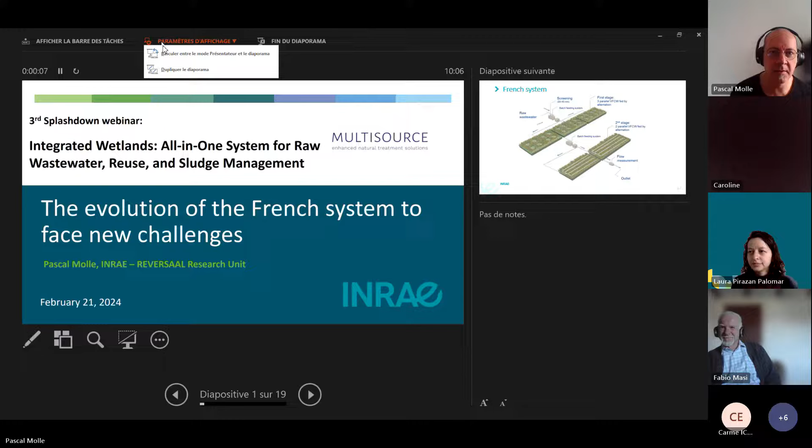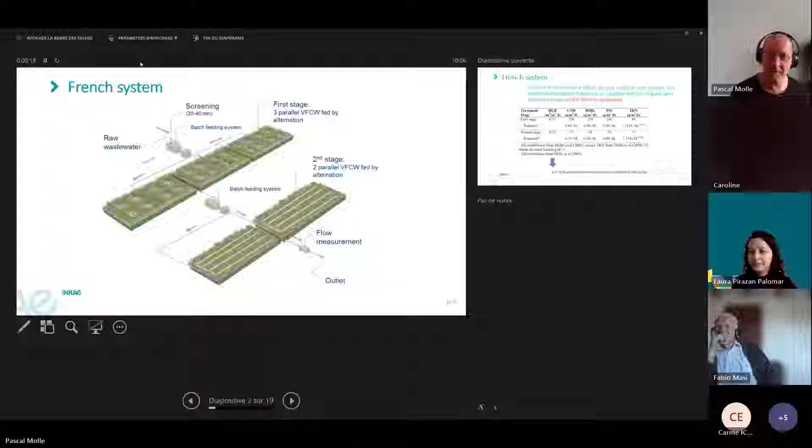There you go, thank you Laura. So I will share my presentation. Do you see it? Yeah, okay. Is it the good screen that you see? No, still not in presentation mode. Not even. And here? No, it doesn't change. Okay, I will do it like this. Should be good. But no. I'm not sharing anything, right? No, okay, I'll do it again. Yes, should be good.

Perfect. So good morning everybody. I will present the evolution of the French system. The French system is the system that historically treats raw wastewater directly, meaning we treat the wastewater and the sludge as well. I will show a bit of the evolution, and at the end, what we are digging into in the framework of MULTISOURCE, the evolution to face new challenges. One of them being to have a decentralized approach in urban areas and for reuse purposes. It will be a quick presentation, so obviously not enough time to go deep into the details of design and performance, but just to give you a main idea.

So historically, the French system's classical design is two stages of unsaturated vertical flow system. As you can see in this figure, at the inlet there is only a raw screening to be sure that all the pumping or gravity dosing can work properly.

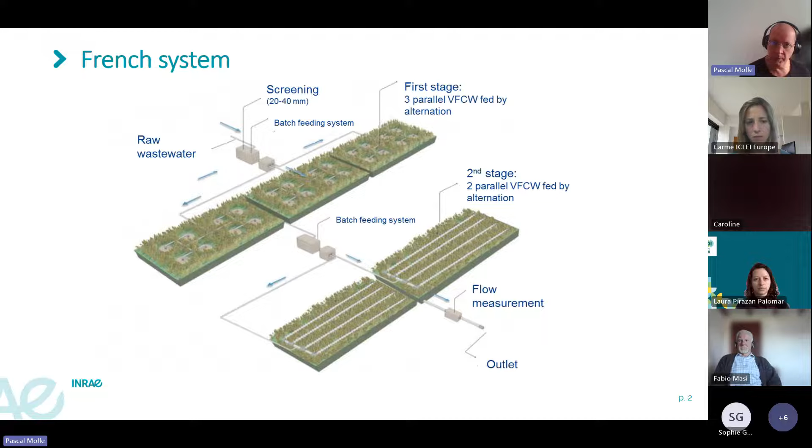This system is designed according to load on the filter in operation, because there are 3 filters to manage this organic deposit, to have filling periods and rest periods, allowing the deposit to stabilize. Only 1 filter is in operation at the same time. We look at hydraulic load, COD, BOD, TSS, and TKN loads. For organic load, it's measured in grams per square meter per day on the filter in operation.

That's how we can design the surface we need to implement. And we have well-established removal performances for each stage. You can see that for COD it will be 80% at the first stage, 90% for BOD, and 90% for TSS. So the removal performance is quite high.

It's not the same for TKN, because the more we load the system, the less we treat TKN. So there is a relation that has been established that allows us to define what the performances will be at the outlet.

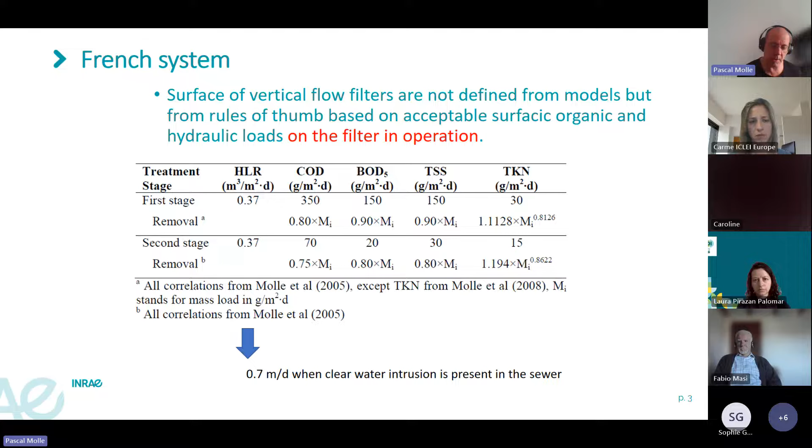For the hydraulic load, we have to keep in mind that we can have higher hydraulic load when there is clear water intrusion in the sewer. That's the water table from the ground entering the sewer, which can bring high hydraulic loads. In that case, we know we can double the load without any problem on the system, showing the robustness of the system. So that's for clear water intrusion.

But for storm water arriving in the sewer during rain events, we have other rules. We can design by security, increasing a little bit the surface of each filter. But we can also use simple design rules that we developed in different research projects to accept higher hydraulic load.

Here's an example of daily loads on a full-scale system, a 2000 people equivalent system. The nominal load in dry weather condition is 37 centimeters per day on the filter in operation, but sometimes we can reach more than 5 meters on the filter. If designed properly, we can accept a huge amount of storm water, because it doesn't happen every day.

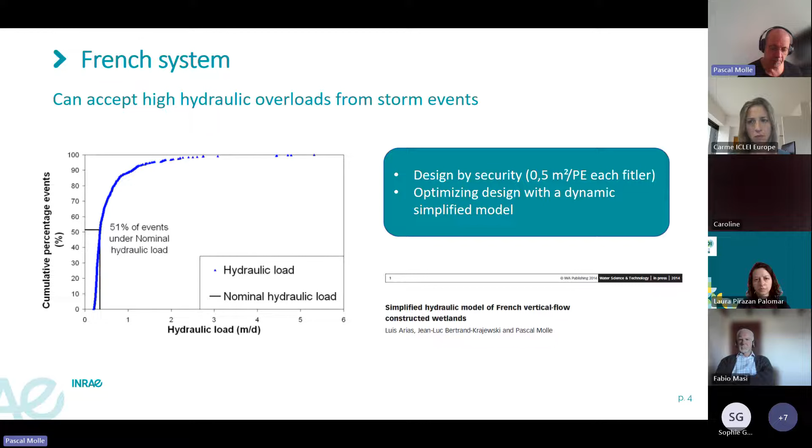So it's really important to show that we can face very large events of hydraulic load.

The question was: is it possible to increase the performance of the first stage to avoid needing a second stage afterward? This would decrease the cost and the footprint, for example. For that, there are different solutions.

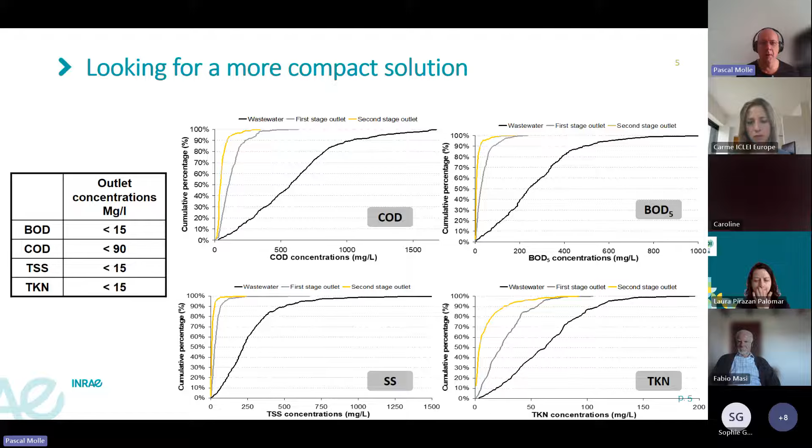We can use only one stage system and make recirculation. For that, we need to increase a little the surface of the system. We usually fit the system to have 100% recirculation, and then we can ensure those outlet concentrations.

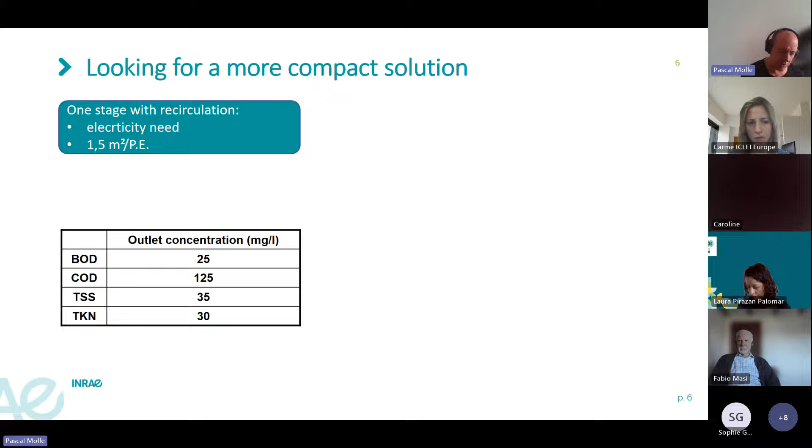But recirculation means electricity somewhere. So the second question was: is it possible to work with a one stage system without electricity while increasing performance? That's where another system arrived a little more than a decade ago.

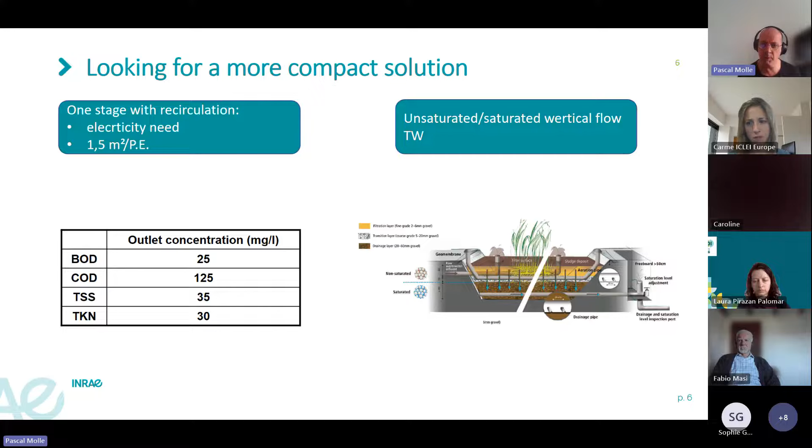It's a vertical flow system, unsaturated on the first part, classically the French system, and below there's an increase of the drainage layer to implement a saturated vertical flow system at the bottom. The objective is to enable denitrification, and denitrification means carbon consumption as well.

Here's an example of the performances we can achieve for denitrification in this saturated layer. These performances increase with the hydraulic retention time in the saturation layer, and also with the ratio of COD and nitrates arriving at the saturation layer.

We have main rules to define denitrification efficiency in temperate climates, and the other points at the top are for tropical climate, showing that with high temperature, the denitrification process is very fast.

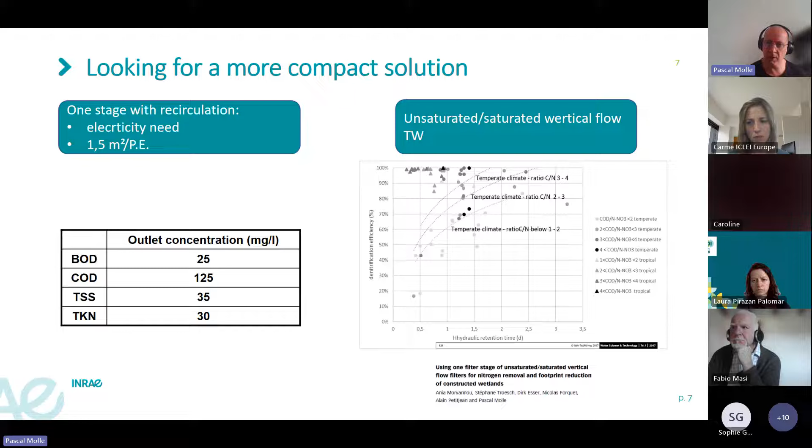With this, we can ensure high removal performance for BOD, COD, and TSS with only one stage. For nitrification, it will depend on the layer we put for the unsaturated filter and the depth of the saturated layer.

Basically, we can reach a level of 60% nitrification if there is no recirculation. If we do recirculation, we can increase this to 90%, but in that case denitrification will not be good enough, so we'll be low in terms of denitrification with recirculation.

But if there is no recirculation, and we can increase the retention time in the saturated layer, we can reach a maximum of 70% for total nitrogen removal, which is quite interesting and can be suitable for certain contexts.

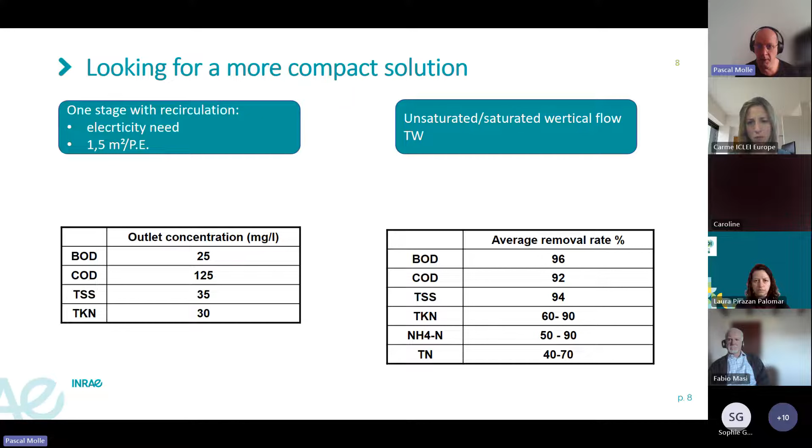The question after is, if we want to implement the system in urban areas for reuse purposes, we need to go further in terms of treatment. If we look at different constraints on the system in terms of treatment objective, from the very simple carbon to more complicated pathogens, for example.

And we look at some design rules here. I put only the compactness and the surface, but there are others. And if we look at external conditions, it can be temperate or extreme, for example.

There is a zone here when we want to implement this in urban areas where we need to dig a little bit more. It means that the zone needs a high level of treatment, to be really compact, and to face extreme conditions. Because, for example, the more you are treating a small area, a building, the more load variation and concentration variation you will have. So we need to face this.

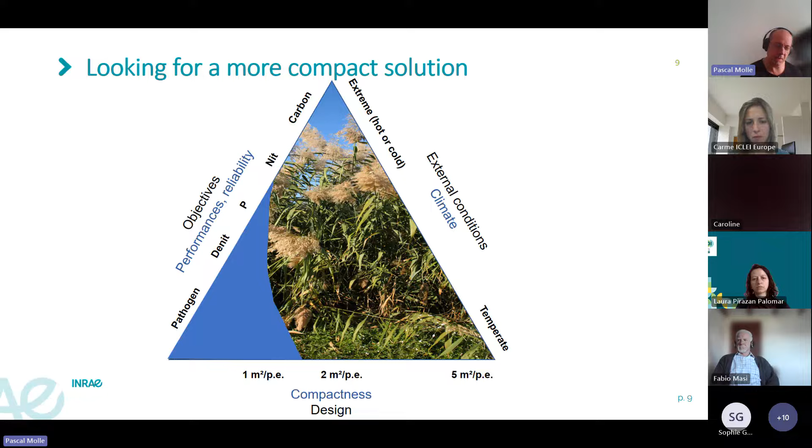For that, there is a system that has been developed by a private company, EcoBird, that implements the possibility to accept raw wastewater on top, but on the bottom there is aeration, forced aeration, to increase the performance.

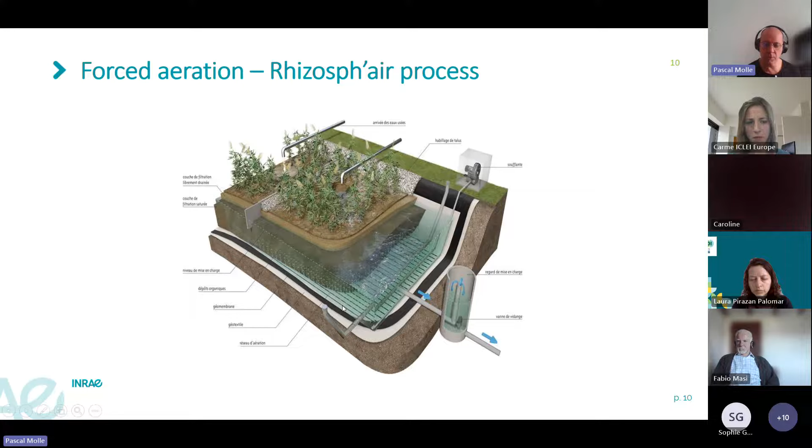The system is basically composed of two filters in parallel, just separated in the middle. The first layer of the system is unsaturated, but very, very thin, only 20 centimeters. And below there is a 1 meter deep saturated system, in which we are blowing air to bring oxygen according to the needs.

So basically, when we are feeding the system here on the right, the water will have a mix of vertical and horizontal flow. And then the outlet will be on the other side. That means it will go through the other filter, but below the unsaturated layer, to get to the outlet here. So here we'll get a horizontal flow.

So we have a primary filter where we are feeding the system, and a secondary filter when there is no feeding, during 3 days and a half. And when we do rotation, it's the opposite: we feed here, close the valve here, and the outlet will be on the other side.

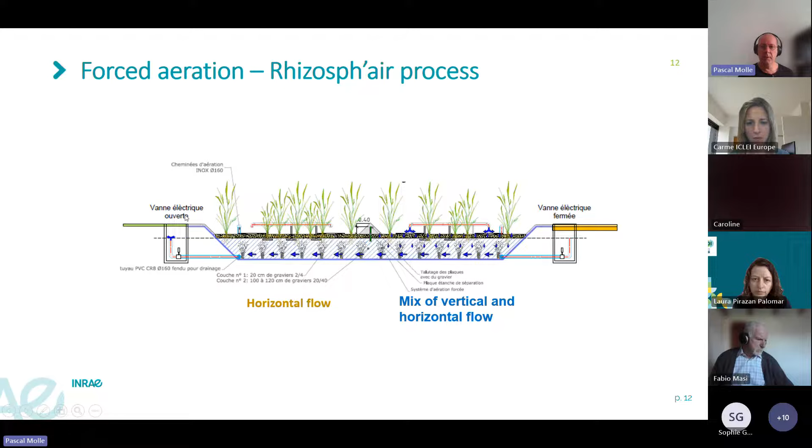With this system, there are different full-scale systems that have been done for small villages, which we monitor and are still monitoring. There are something like 25 systems like this in France actually, and you can see it's really good for COD, BOD, TSS, and even nitrification. It's a full treatment in one stage.

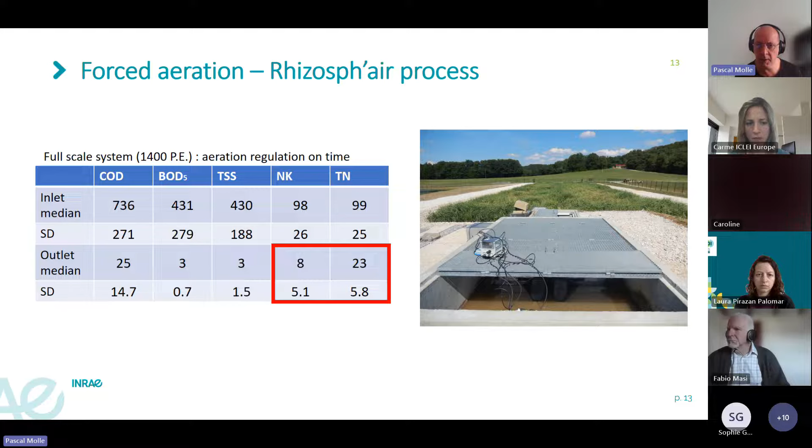For nitrogen form, it will be different according to how we are managing the aeration strategy. If you look at the evolution of oxygen concentration in the saturated zone, you can see that we can put aeration on to add oxygen, then stop aeration to decrease it and implement an aerobic phase and an anoxic phase. Thanks to that, we can improve TN removal in the system.

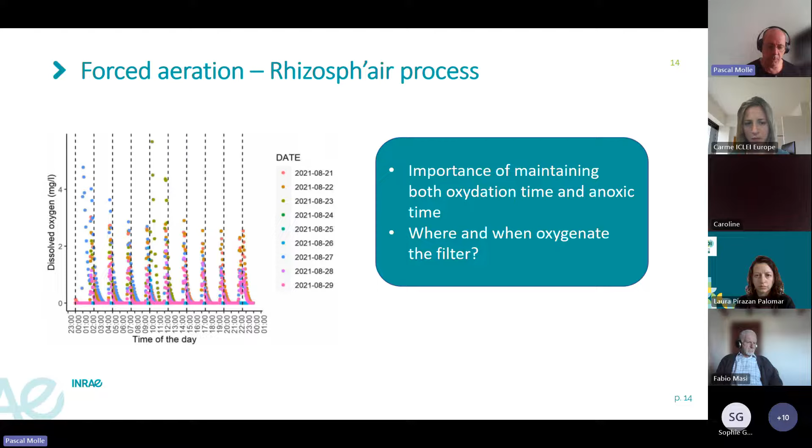The question is where and when to put on oxygenation in the filter, because we can do it differently in the primary and in the secondary filter. The other thing is that we need as well to adapt the design of the aeration system itself.

For that, we needed to understand the role of aeration. There is here an example of how air is distributed inside a column according to the airflow, the type of material we put in, and the number and density of diffusers we have. Basically, we can see it is possible to have an uneven distribution where there is no color in the column, meaning we do not see where the air is passing because it's too thin in the middle. So the bigger the material, the more heterogeneity we will have at low flow, and we will need to increase the airflow or increase the diffuser density to have a homogeneous distribution of air inside the system.

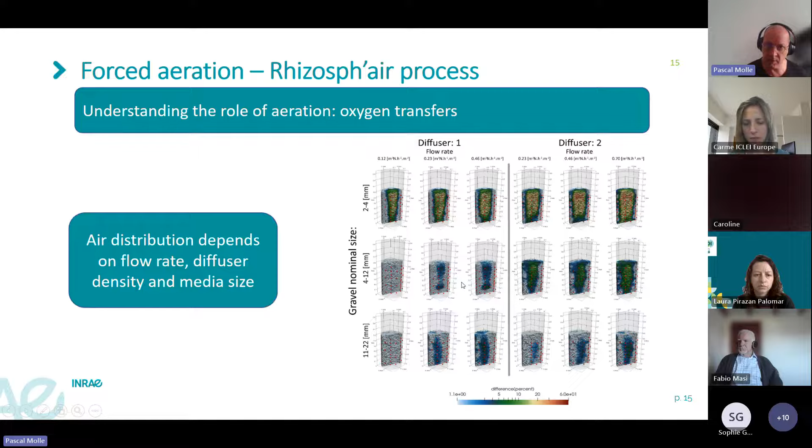Then we can look at, according to the number of diffusers and the particle size of the media, how much oxygen we would transfer to the system, which is really important in design, because we need to know exactly what we can transfer for the consumption, for degradation of pollutant, and the consumption from bacteria. We can see that if we increase the airflow, we increase transfer, but we reach a plateau at a certain point, showing there is no need to go to high airflow, because in that case we will consume too much energy for nothing.

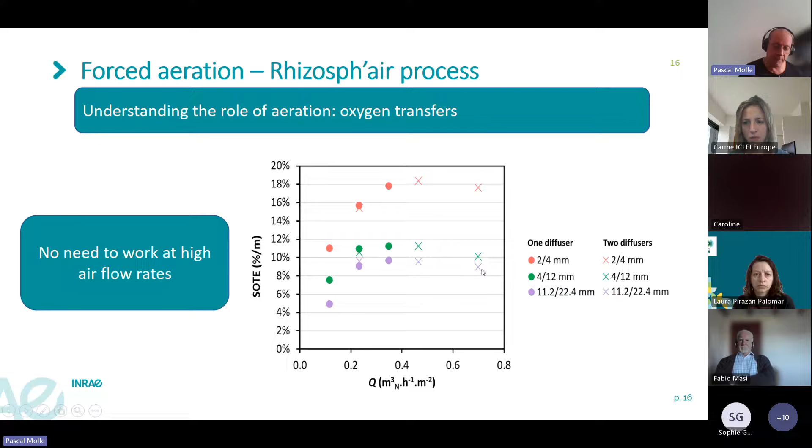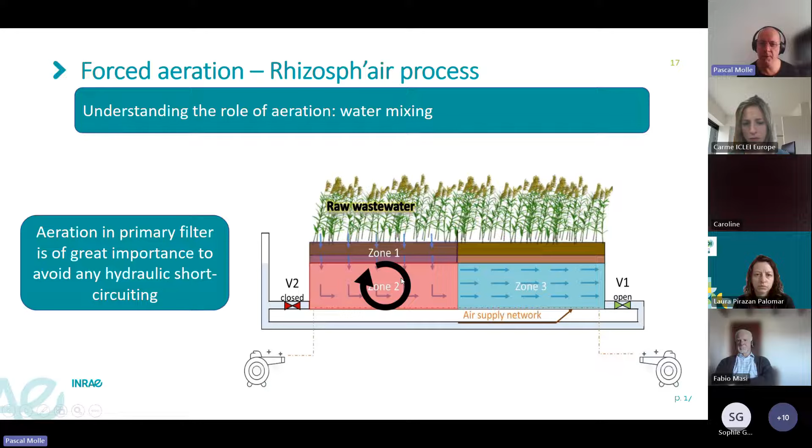So we have rules for that. And then the question is where to put aeration in the system and how much. And what we observe is that it's really important to have a good aeration strategy in the primary filter, because it's also a way to have good mixing and to avoid any hydraulic short circuiting inside the system. So it really improves the performance.

And after, what we can see, there's no difficulty for the carbon degradation, I would say, and solid degradation or entrapment. We can reach full nitrification easily, but for TN removal, there is a different strategy for that.

We can do it by time, by flow according to the inlet flow, or with a probe that we can put inside and control aeration according to the oxygen content. By time, we can reach 70% of TN removal. By flow, we can be a little bit more precise and reach 80% removal.

And by oxygen content, it's what we are digging into actually a little bit more in the framework of the MULTISOURCE project. There is already a first paper that discusses all this strategy, but it just shows that we can go quite far in TN removal, even in only a one stage system.

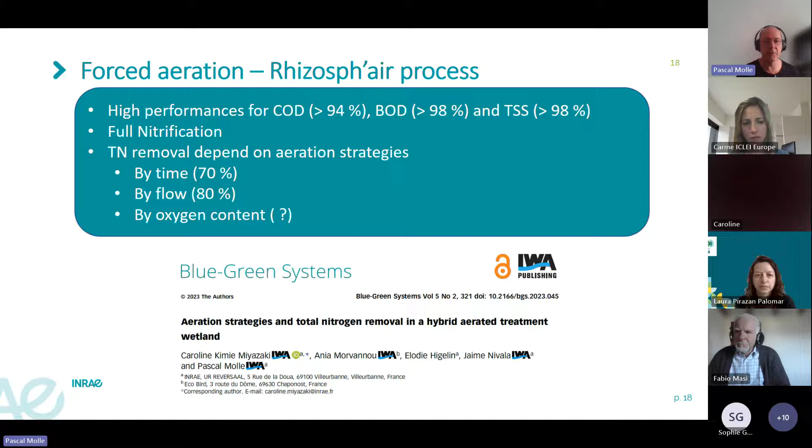Not presented here, but which is important for reuse purposes as well, is that we are monitoring the system for pathogen removal and for micropollutant removal. No time in this presentation to speak about that. Well, thank you for your attention, and if you have any questions, I'm here.

Thank you very much, Pascal. This indeed is super inspiring, also for keep on digging and consulting, especially this paper. I'm very curious about it. I'm definitely going to have a look, to keep on learning these aeration strategies and how these wetlands also are working for wastewater treatment. It's very, very inspiring. The questions, please.

Fabio, your mic, Fabio. Yeah, the mic is muted. Sorry, so I'll start again. It's fine, there you go. But so the screen is good. If you were sharing the screen, maybe you can. I'm not anymore. Oh good. Yeah, you can try again.

Now it's perfect, good. So many thanks, Laura, for the nice introduction before, and thanks to Pascal for the perfect explanation of the processes which are behind this kind of technology. And what I'm going to show you is just how we practitioners have applied the theory in the real world. So I will just show some case studies of the different kinds of implementations for this technology.

So I'm just starting with some pictures of the oldest systems, which are the ones developed in France. In France now they have several thousand of these systems. If I remember well, it's about 5,000 at the moment, the ones which are full-scale realized in operation. They are all even quite well monitored, and there is available, at least for somebody — I mean not everybody has access to it — but there is a national database where all the data is well organized.

So it's possible to understand the performance statistics even for quite long operational periods. In this picture I've also put a picture of this self-priming siphon. That's the one more adopted for giving a lot of water in the unit of time and not using energy to the beds, the two following stages of the beds.

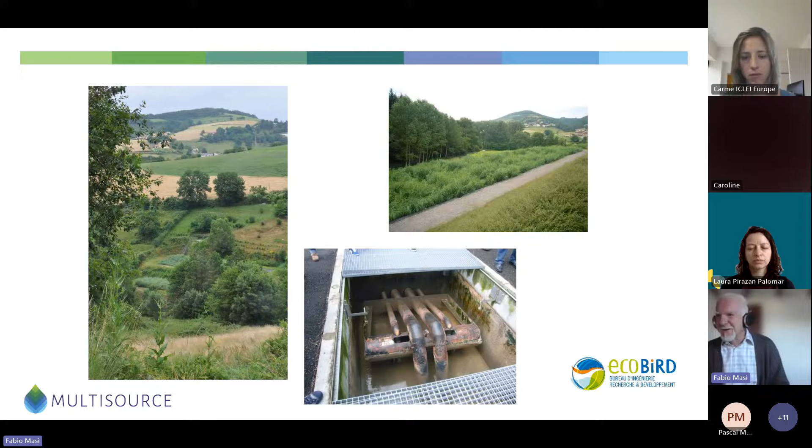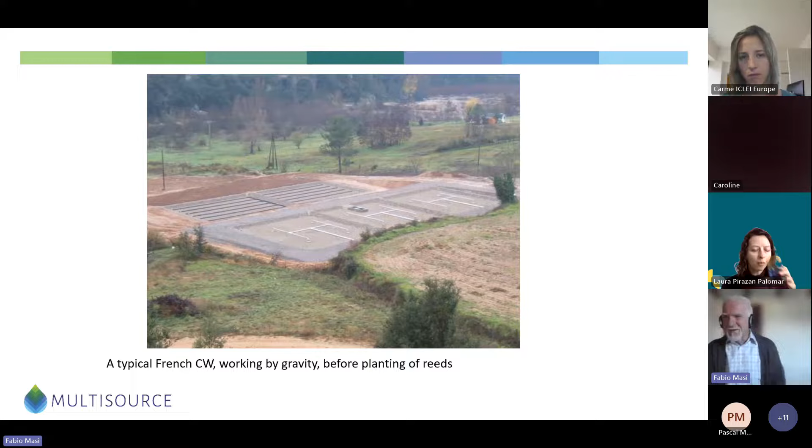And here you can see in detail how the feeding system — those are normally steel pipes — are mounted over the first stage of the French system. So those are all installed in France, and the normal range has been for several years below 2000 PE.

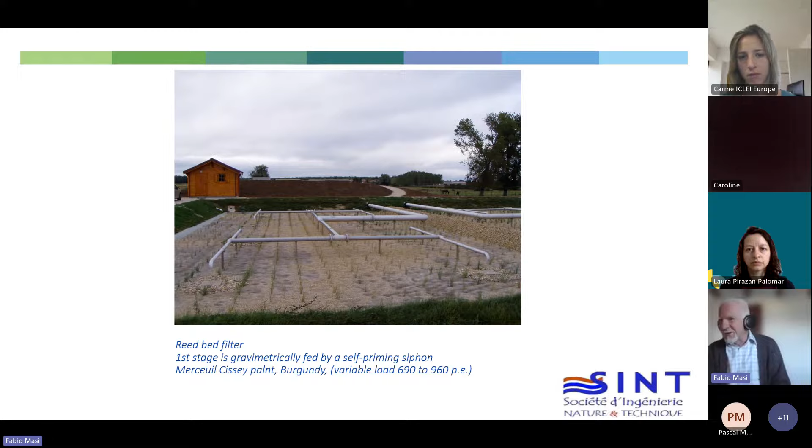According to the Urban Wastewater Directive of the European Community, which is nowadays anyway changing, the threshold for having a mandatory biological treatment, so the secondary treatment, is going to shift to 1000 PE. And that's opening the market for this kind of French systems for about 350,000 small settlements, which are between 1,000 and 2,000 PE, which are present in Europe and still untreated.

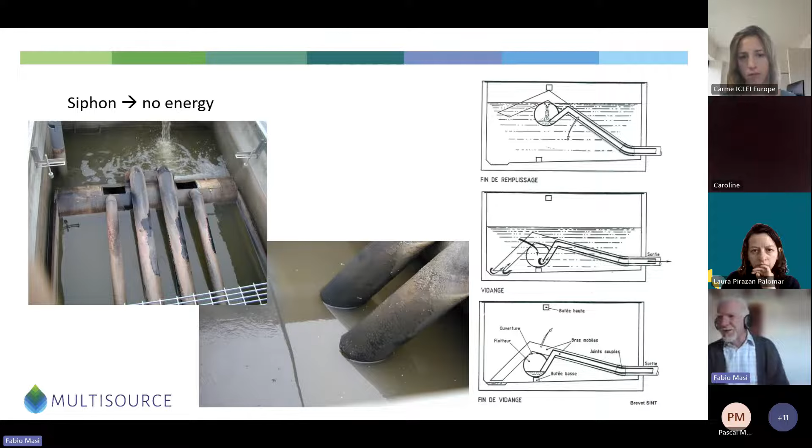And that's only the European market we are talking about. And it's already a quite good number in terms of market exploitation chances in the future. So here you see some details of the siphon.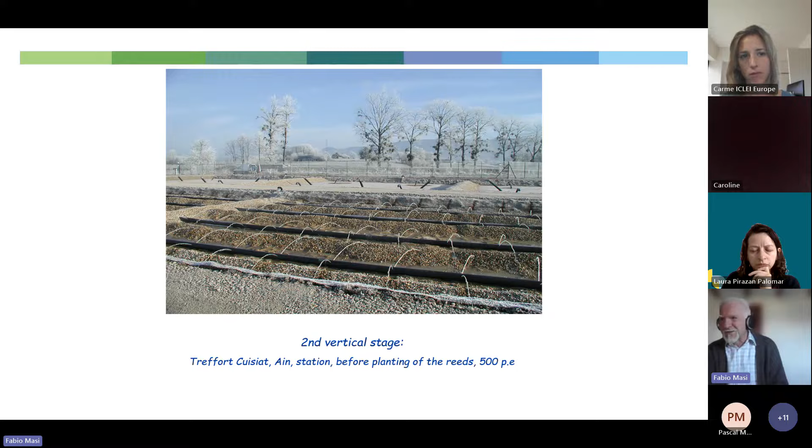And now I start with the cases done in Italy by us directly. That's, for instance, a village of about 1,000 population equivalent on the Apennines, so it's top of the mountain. It's 1,400 meters of elevation, quite cold in winter. It's all covered by snow.

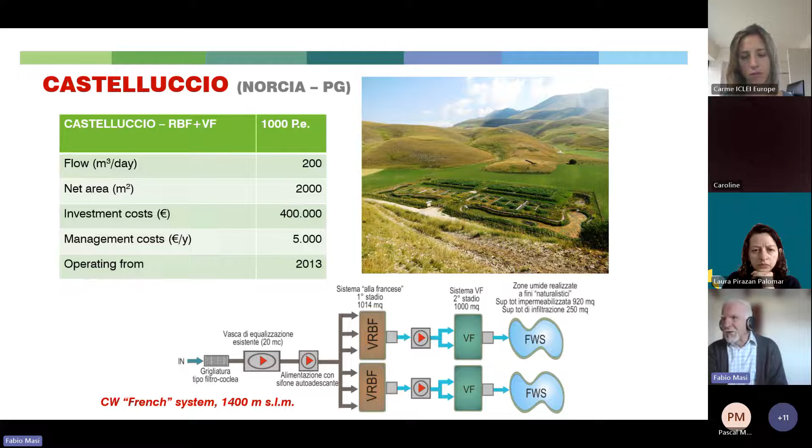Here you can see that the investment cost is 400,000. We have an OPEX quite low, as we have demonstrated, even publishing a paper about that, as we are reaching an OPEX of about €6 per person equivalent per year, which is a very low number if you compare, for instance, with an activated sludge system. In this paper, we compared with an SBR, and for the SBR the O&M is around 60, let's say, ranging from 45 to 75. So it's like 10 times higher in terms of OPEX in comparison to a nature-based solution.

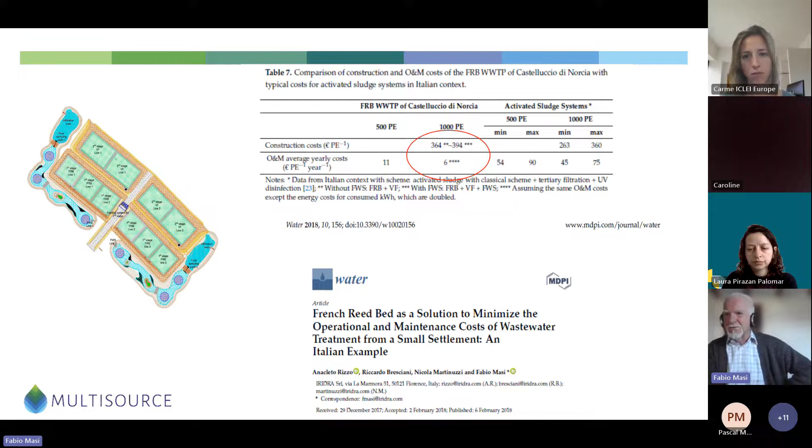The performances we have obtained here have been monitored by the local water utility, and as you see here, we are for all the parameters over 95% removal.

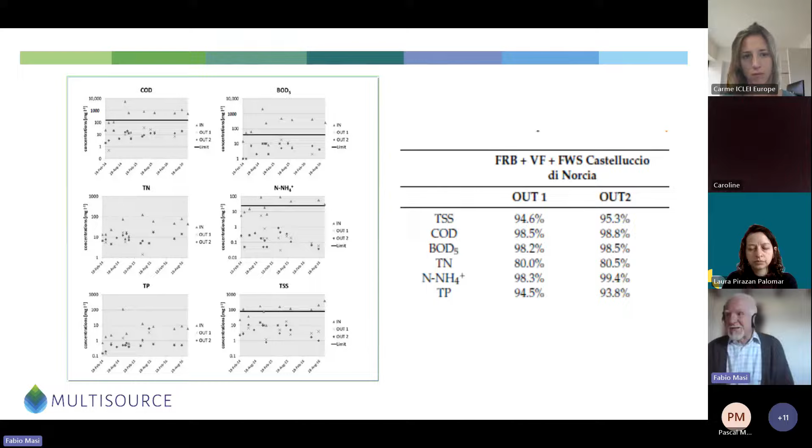A very nice installation is in the south of France. Negrepelisse is the name of the village. That's a quite huge installation, and here finally the limit of 2,000 was superseded somehow. They are treating about 4,000 population equivalent, and there are several of these 4,000 P systems nowadays in France.

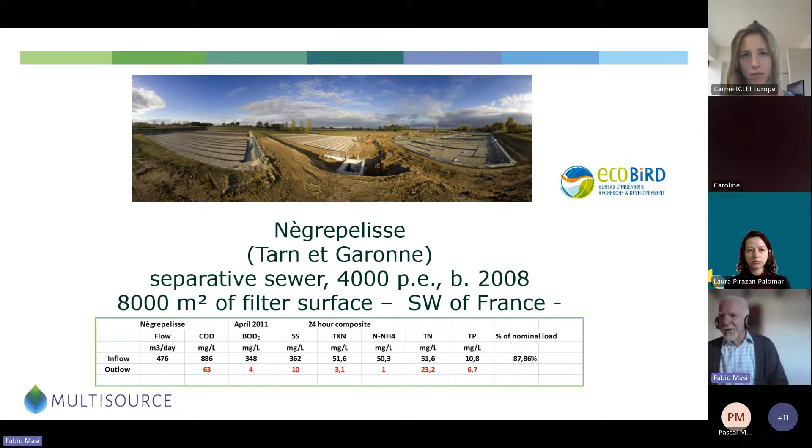This system is quite particular because it's treating both the separative sewer wastewater with this installation of a double-stage French reed bed. But there is also, beside this installation, another smaller one where they are collecting all the sludge harvested by trucks, the primary sludge from the septic tanks, which is then treated locally by a sludge drying reed bed unit. That's quite a beautiful system, quite complex.

What I wanted to show is that when we shift the sites and go from a few hundred to thousands of population equivalent, obviously the feeding system is getting more complex. And then we are using pumps and PLCs in order to manage all the feeding alternation.

Some pictures to show how these kinds of systems can play quite well in terms of aesthetical insertion. It's quite nice to include in the designing teams some landscaping architects, because you can really make this kind of installation into fruition areas where people can also go around and enjoy the nature.

So those are still pictures to show you how these systems are looking after a few years of operation. Here you can see, for instance, the sludge layer which is just growing over time in the first bed, and then the sludge, after quite a long period of composting that can go up to 10 years, is just dug out and then used as soil conditioner.

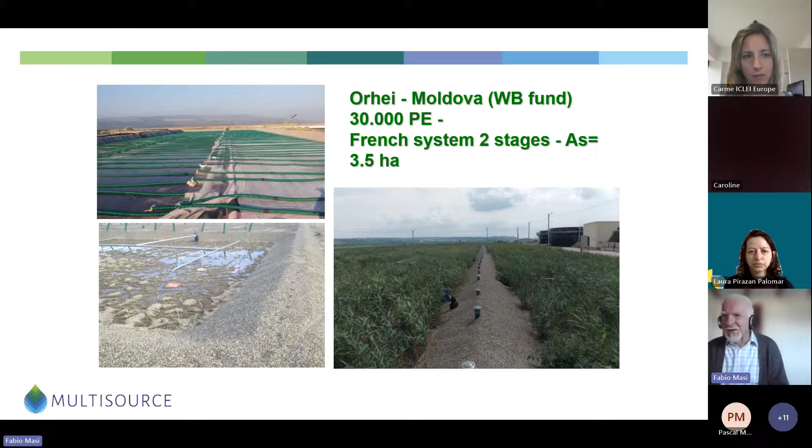Then we designed these parallel lines, just replicating the French installations in Moldova for the city of Orhei. That's at the moment the biggest French system existing on the planet, because it's about 3, 3.5 hectares in total.

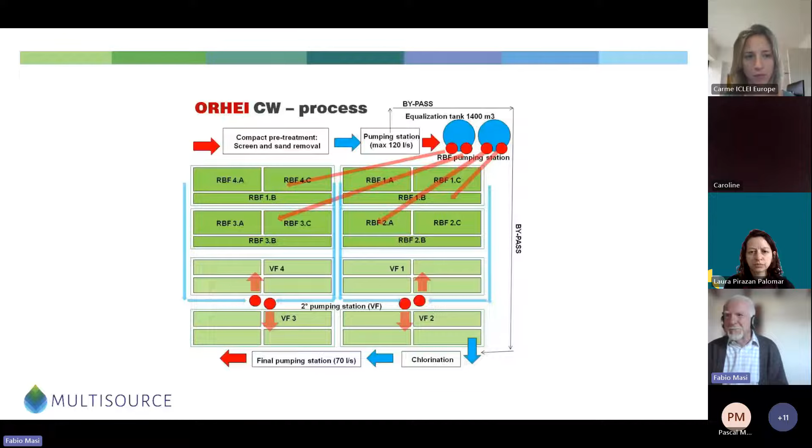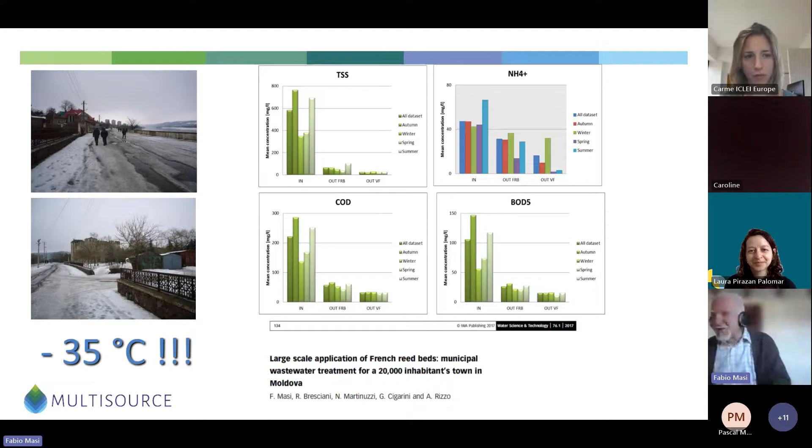Here, obviously, the feeding is quite a complex thing, and we are using a lot of pumping stations and PLCs for obtaining all the right feeding. The performance is quite good, even in such drastic climatic conditions like minus 35 degrees in winter, where we are still obtaining good removals also for nitrification, which is obviously decreasing in cold temperature. But we played everything in order to keep the temperature of the water high enough, at least for not being frozen.

So, discovering that we were able to work properly also in cold conditions, we decided to go up to the mountains. Those are some applications we have developed with our French colleagues of Symbio and Ecobird - in this case it's Symbio. We worked in an Interreg project where the Italians were installing on the Italian side, in the Maritime Alps in the Cuneo province in Italy. It's a small system, but you can still see how the performances are fine.

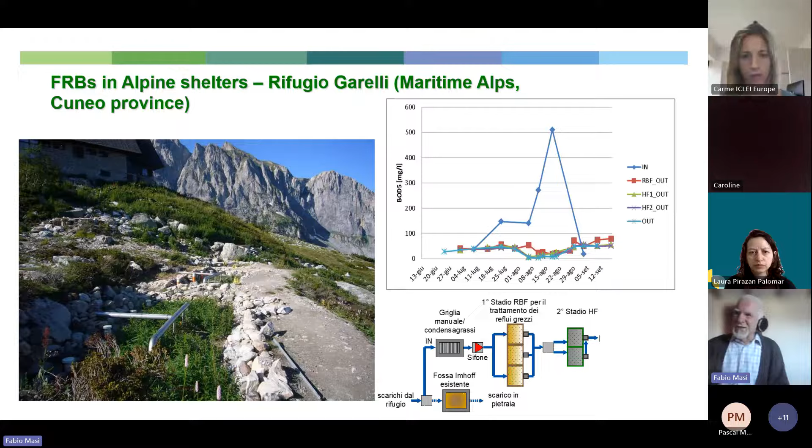Here the double stage is a French first stage, and then a horizontal flow for the second stage for completing the nitrification. A similar installation has been done on the French Alps, on the other side of the mountains.

Another application was related to high-strength wastewater fluxes. When you have a lot of organics, a French reed bed as first stage can perfectly work for keeping most of the organics there. So even with very high-strength wastewater, we still have 75–80% removal of organics in the first stage.

That's perfect for exactly this kind of wastewater, where the COD can range up to some 1,000 milligrams per liter, especially during periods when they are washing the containers where the wine is kept, or during the periods when they are processing the grapes themselves. So that's quite a whole system.

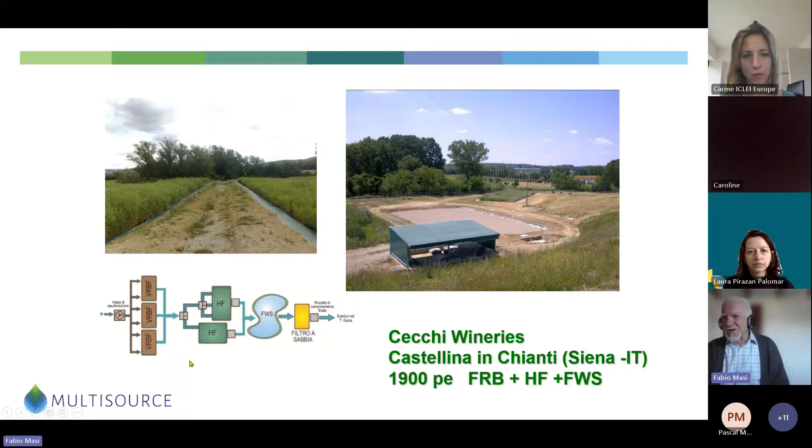The first one we applied for a winery. At the beginning it was simply a horizontal flow free water system for 50 cubic meters. It clogged after the production doubled its capacity, so the wastewater also doubled. We made an upgrade of the system, adding a first stage of French reed beds, and then we just doubled the horizontal flows and kept the free water as it is. So that's a multi-stage system.

The concept of using French systems in multi-stage constructed wetlands is very valid, because we can assign roles—for instance, to the first stage—to make this good filtration of organics and suspended solids. Those you see in the picture are exactly the French reed beds installed there.

What we have observed is that the growing rate of the sludge—how it accumulates in the first bed—is about 1 centimeter per year. So if you make, say, 20 or 30 centimeters of freeboard, that gives you the chance to accumulate sludge for a period of even 20 years before having to dig it out and use it as composted sludge in agriculture.

Following this first experience, we had a lot of other contracts still in the Italian market for wineries, and we developed several of them, where in all cases we put a French reed bed as first stage, followed by horizontal flow and free water for refining the treatment afterward. The free water stage is not so essential—we do that only when we are in flat areas.

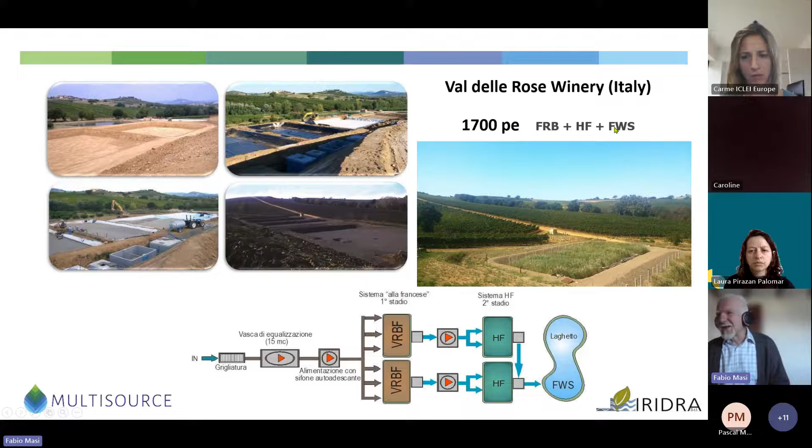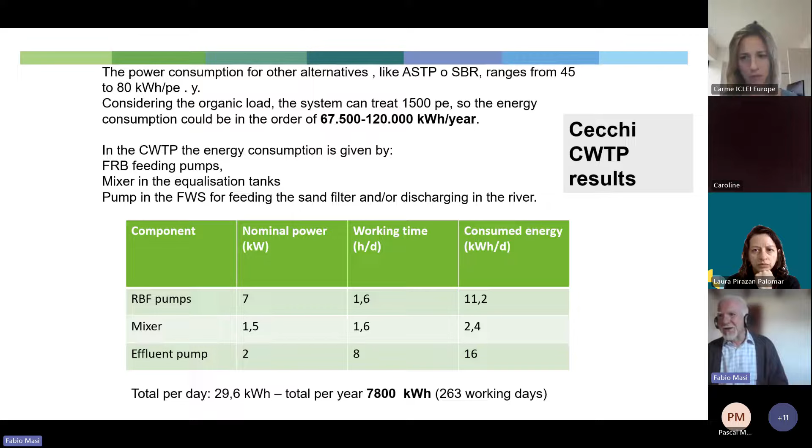If we compare the savings of this kind of system to an SBR, the CO2 equivalent emitted is much less. You see the consumption here: SBR plus wetland, that's pure activated sludge, compared to what we obtain instead with our constructed wetland—7,800. So we have a reduction of about 43 tons per year of CO2 emissions and a 90% saving of energy, which is quite good.

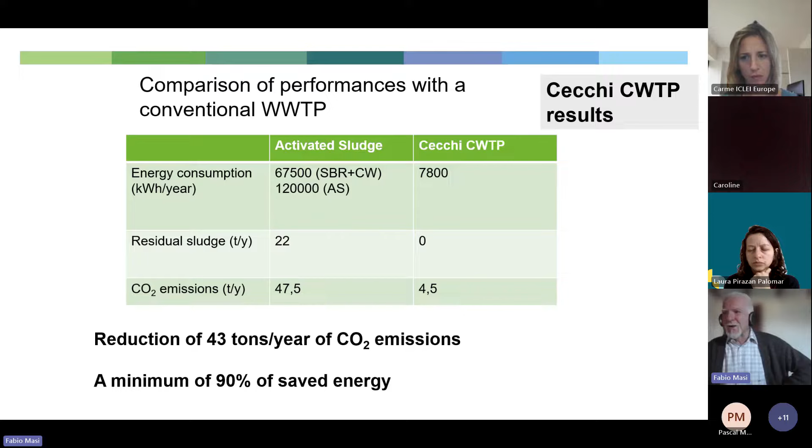Still going up in scale, that's what we are monitoring in the MULTISOURCE project, trying to optimize the aeration rate—when, where, and on which occasions to turn on the aeration. That's a treatment system treating the water coming from the very last bypass before a centralized wastewater treatment plant located in northern Italy.

The WWTP is quite good, serving 120,000 population equivalent, and the treatment is a French reed bed with aeration on the bottom, quite similar to the rhizosphere that Pascal was showing in the very last slides.

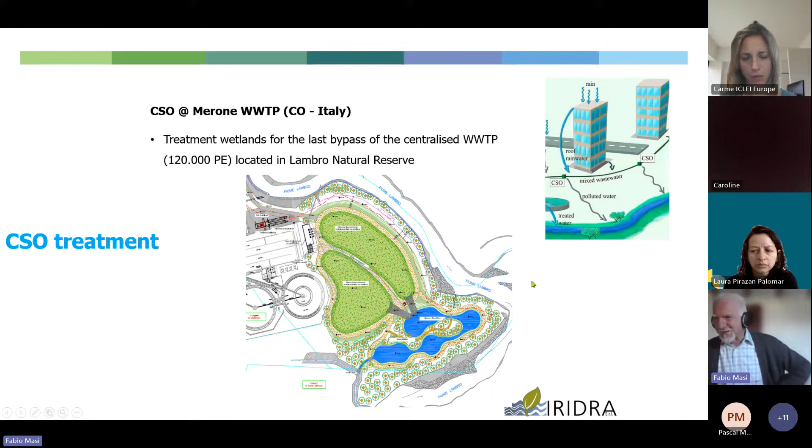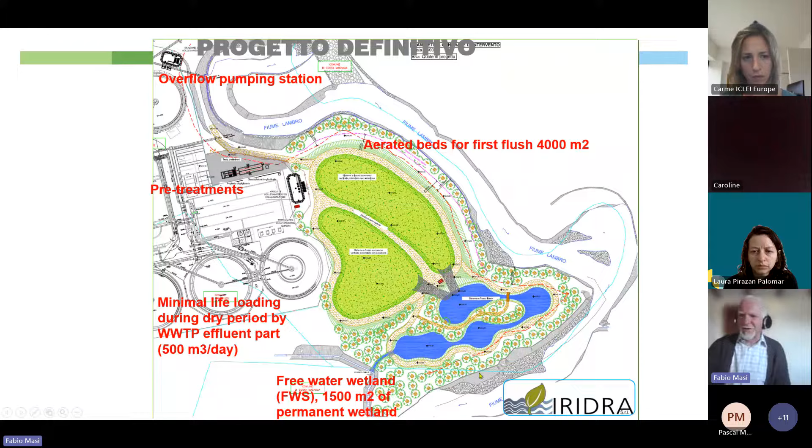That's followed by a free water system just for renaturing the water before it enters the Lambro River, which is quite a polluted river in northern Italy. Here the aeration is diffused across all 4 cells that we have, and that's the way it works.

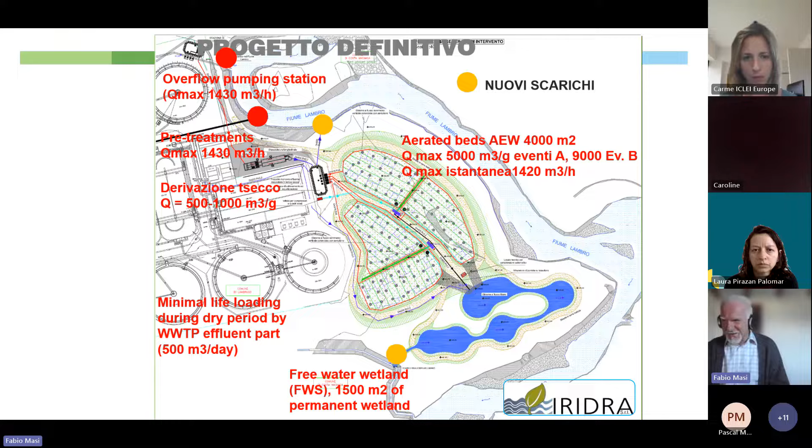So we have been forced, for instance, to add here the aeration because the area was not big enough for having, in hydraulic terms, the chance to implement a passive treatment instead of an enhanced one, which is exactly what we obtain adding the aeration on the bottom.

I just want to show you what are the costs for such a huge system. So in the order of 100,000 PE, it's about 37,000 euro per year of total cost, and you can see above how this amount has been obtained.

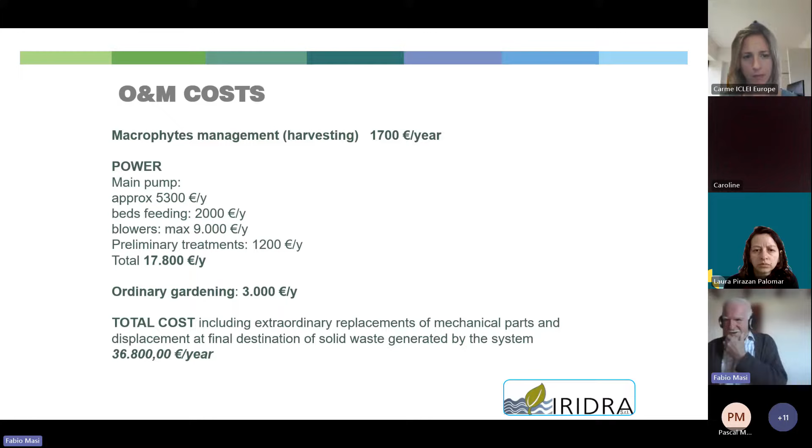Similar installations are done also in France, where they have several systems which are now treating combined sewer overflows.

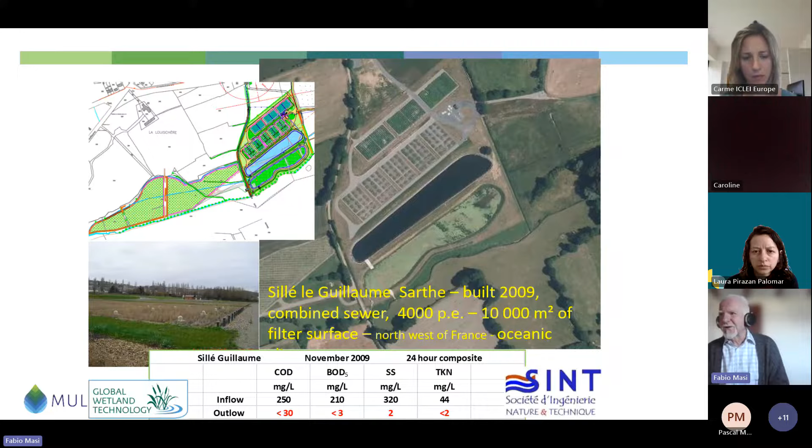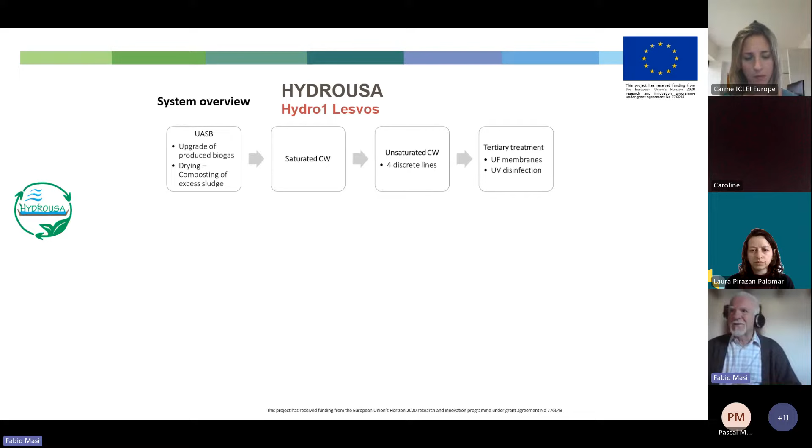And the very last, which is anyway in my mind one of the best applications we can think about for the next future for spreading this technology all around the world, is just to try to replicate the experiment we have done in the HYDROUSA project, in this Hydro 1 demo site in Lesvos, that's treating 100 cubic meters per day.

It's a UASB, so anaerobic treatment followed by a saturated and then unsaturated vertical flow constructed wetland, double stage. But the first saturated stage, and also the anaerobic reactor, can be fully substituted by the first stage French reed bed with the same results.

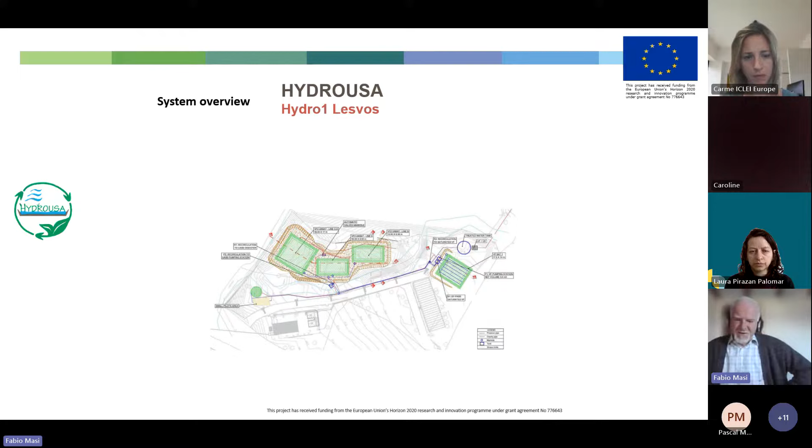This system has been very deeply monitored for more than 2 years. We have demonstrated that we can reuse the effluent after UV disinfection for making fertigation.

So here our aim is not to make denitrification, but to use instead the first stage of the French reed beds as a good nitrifier. And so we are producing a lot of nitrates, which are good as fertilizers.

And we go into fertigation, and we have demonstrated that the agronomic yields are quite good, very good. I would say completely comparable with synthetic fertilizer fertigation schemes.

And it's even safe. So our Spanish colleague in Girona is making the analysis of the micropollutants, and there are no big risks for the moment that have been put in evidence.

So we got the ETV, the environmental technology verification, and we are simply replicating the installation of Hydro 1 on our island in Italy, Gorgona Island, where we installed our first passive horizontal flow wetland like 25 years ago. Now we are upgrading it, substituting the first 2 horizontal beds with 2 French systems, and we will then reuse all the effluent for fertigation.

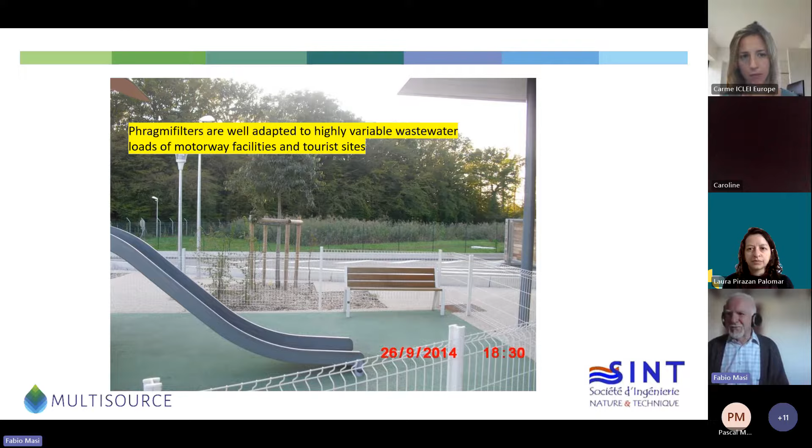And with that, we have concluded. Many thanks. I'm open to questions.

Thank you very much, Fabio. This is very, very insightful, especially looking at all these applications.

I think, in my perspective, it gives me a very clear idea how all these systems that Pascal was explaining, in theory, how they work, but in application I think it's very, very inspiring how we as researchers, applicants, and these type of projects are going to reach into these nature-based solutions for treating water and also for urban planning and so on. I think it gives a lot of good ideas and is also inspiring for other research as well.